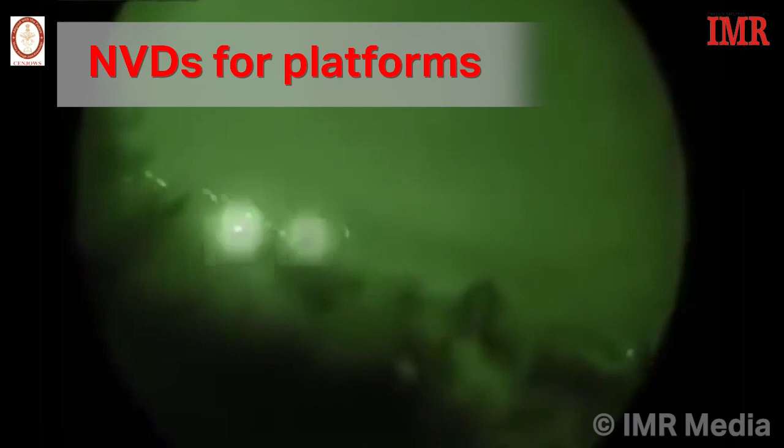The Director General of Infantry, Director General of Capability Development, the Director General of Armored Corps and the Additional Director General of the Army Design Bureau were among the distinguished speakers. There were 7 sessions over 2 days and the video recording of the proceedings were rebroadcast over the next 2 days.

So are we a go, sir? Yes, sir. All right.

So I will now start this session on emerging technologies. Gen Srivastava, Gen Arora, and my fellow esteemed panelists, and all those who have logged on to hear this session on emerging technologies, my greetings to you, and greetings to all of you from the Indian Army.

At the onset, I extend my compliments to the Team CENJOWS IMR for organizing the seminar on night vision and electro-optics, and thank all of them for inviting me to chair this session on emerging technologies.

I also welcome my fellow panelists from the DRDO, Dr. Ranjana, and from the industry. I've met a few of you, and I look forward, and I know, having met you, that we are going to have a very engaging session over the next 1.5 hours.

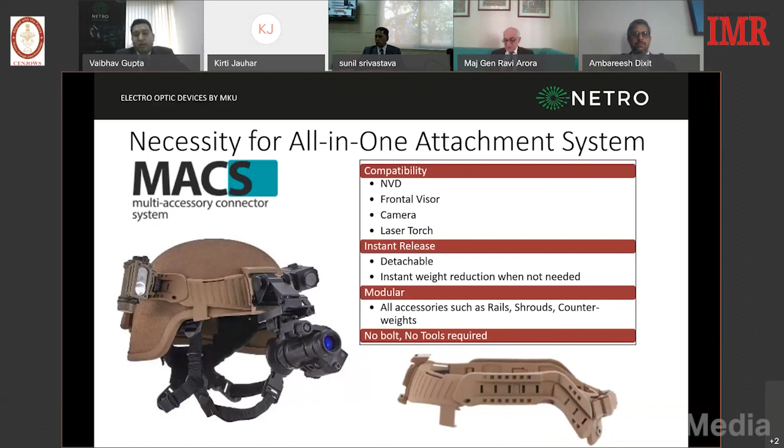This is a very advanced kind of connector system, and I can vouch for it. It is not available anywhere in the world today. We are doing it in India, and it has all kinds of interfaces for mounting night vision devices, cameras, torches, and it's very easy to use and highly recommended for soldiers on the ground because they have to carry a lot of equipment.

Going forward, we are looking into the development of our own uncooled based IR detector as well as the camera. We heard DG Infantry say that Indian companies should focus on development of their own cameras because right now we are dependent on imports and foreign players. So this is where we bring in a lot of expertise.

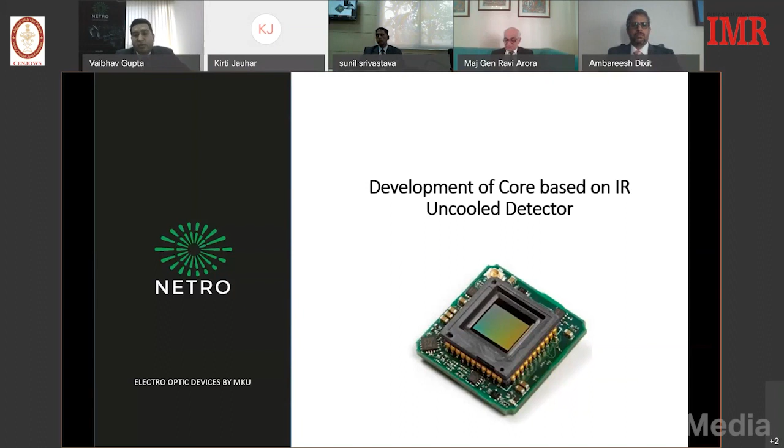The camera will be operated using field programmable gate arrays, which we call in computer terms FPGA. They are very fast and optimized for low power consumption. And the very nice thing about these is that they deliver near real-time imagery.

Right now, whenever we see a sensor and the display, there is a lot of time spent by the algorithm processing that image from the sensor and giving it to the display. This is where our FPGA technology reduces these lags, and you see near real-time imagery at your display.

We are also developing new kinds of algorithms which will help in very smooth non-uniformity corrections, which are required in the LWIR sensors. These are a must-have because earlier manual ones used to obstruct the user for a little bit of time when operating in critical environments, which was not a desirable situation.

So these are some of the technologies we are developing. We are using a fused image between the II channel as well as the uncooled LWIR channel, along with information fusing as well. It's really required that today you must be aware of your headings and GPS locations. So all this will be built into these devices, and they will be offered here in India.

No need of importing. We would be ready very soon, and we'll be offering this for demonstrations, maybe by the end of this year or maybe next year.

Now, when we talk about fusion, a lot of people understand fusion as something which is not customizable. But here is our team of experts and software engineers who really did a marvelous job of customizing fusion, so you'll be able to control the channel feed.

The next slide I'll show you. If you look at these two videos, starting from the top left hand side, you see there is a TI channel, then a day camera channel in the middle, and then you get a fused image. On the top, the fused image has 30% thermal content and 70% day CMOS content. On the bottom, you are seeing 70% thermal content and 30% day CMOS content.

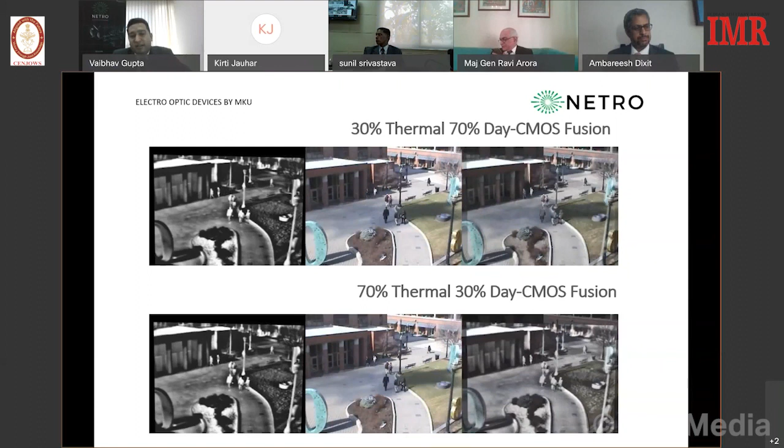This is what we are developing today at MKU, and I'm very proud to say that our team of engineers are doing a fantastic job. This is just a small video I got from them, and I'm showing it to you.

We are going ahead with DRDO, getting the driver night sight technology which can be used on AFVs and platforms. The beauty of this product is that it can be mounted vertically as well as horizontally. It can be used on AFVs, other vehicles, or civil vehicles as well.

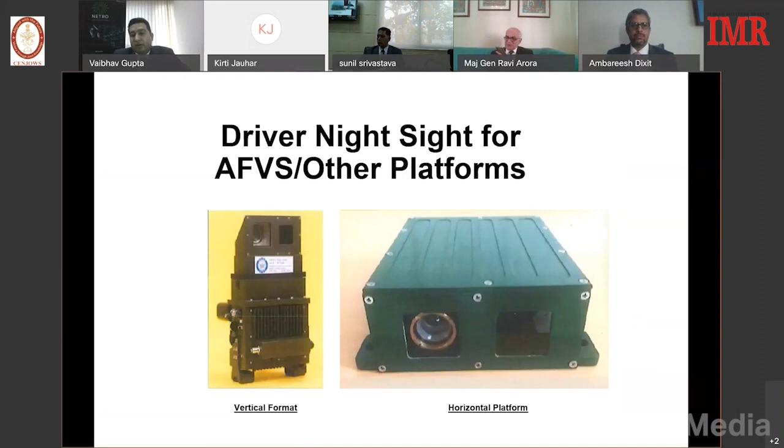It uses a low light CMOS camera as well as a TI camera, helping the driver drive at night without switching on his own lights. This is a beautiful feature, because imagine a CRPF vehicle driving in areas of Jharkhand where it gets really risky. Without needing to switch on lights, using just this technology, the driver would be able to drive perfectly in all conditions.

We believe this is the technology for the future. Even in electric vehicles, such technologies are being worked upon. This is something the Indian Army and paramilitary forces can take advantage of, and it will be made in India, at MKU and other places where DRDO is giving their technology. We would like to thank DRDO for considering us for this technology. We feel really excited and believe a lot in it, and I think it will be a really good product for exports as well.

A lot of the speakers mentioned multi-spectral cameras. Yes, we also believe in this. As my fusion slides showed, one sensor may not answer everything. So we have NIR, SWIR, MWIR, LWIR all coming together in one pack. Every sensor has its own limitations - the day sensor works in a particular band, the night sensors work in a particular band. Going forward, maybe SWIR will do a lot of the job, but you might still need other sensors as well. SWIR offers a lot of advantages.

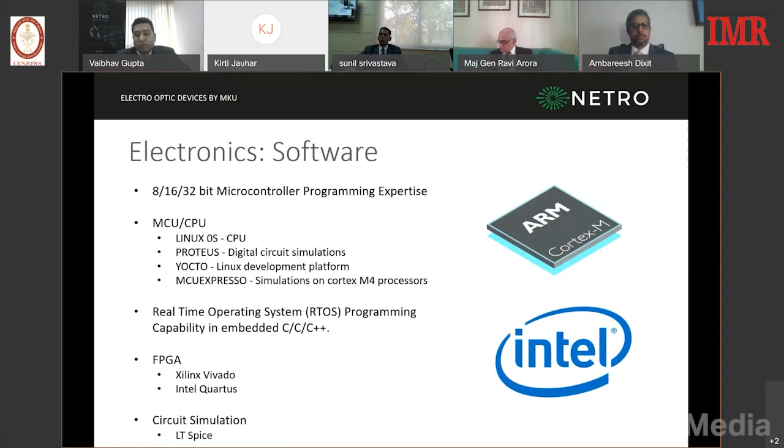We are very much inclined towards R&D, design and development. Some of the tools we use are SolidWorks for our opto-mechanical design capabilities, and Zemax OpticStudio for designing our optics, one of the world-class softwares in the industry. We also use electronics with ARM-based processors and FPGAs for faster processing on these semiconductors, including an FPGA from Xilinx which we use in our design and development.

I think every company here present might be using MATLAB, because this is one of the greatest softwares for simulations, and we are using it to design our deep learning and machine learning algorithms, which I think in the next Night Vision India seminar we would be able to share, along with how we will be deploying them on our sensor platforms and how the user will be able to take advantage.

And this is happening right now and right here, not too much into the future. We believe by next one or two years we should see some products having this kind of capability.

We have invested a lot of money into doing good quality testing and inspection, and we have our own manufacturing setup in Kanpur. We have invested a lot of money in developing a world-class lab, because military products demand ruggedness and durability, and all this is being checked before we ship in India or export to the world, like to Brazil, Southeast Asia, or the Philippines.

These are Generation 3 night vision devices which are being procured. Like Colonel Kober pointed out, we should look at technologies which are already being built in India, and if they are able to export to the world, then why can't the Indian Army harness these technologies for themselves? It would be a pity that things are getting exported to the world and our forces are not able to use such technologies. So we strongly recommend DG Infantry to look at these technologies available in the country, in the private sector or in the DPSU.

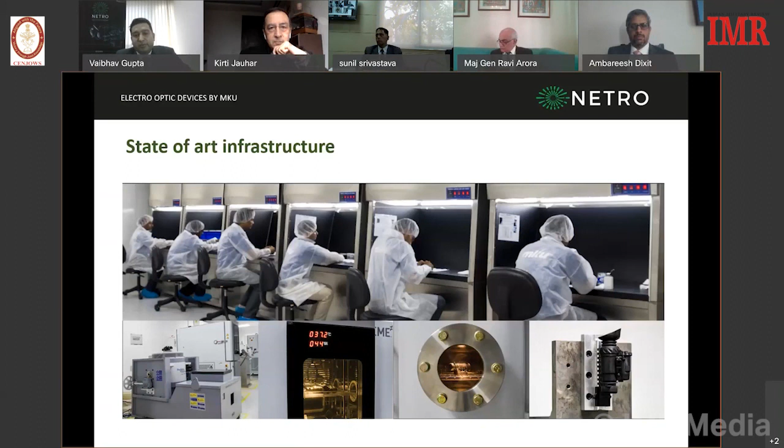Some of the other test stations we have are our own image intensifier tube test stations and night vision test stations, and this helps us to have a very strong supply chain. Whenever we are getting sensors from outside India, it's very important to check them and their quality, because merely relying on data sheets sent by foreign players is not the correct way of procuring your sensors or detectors.

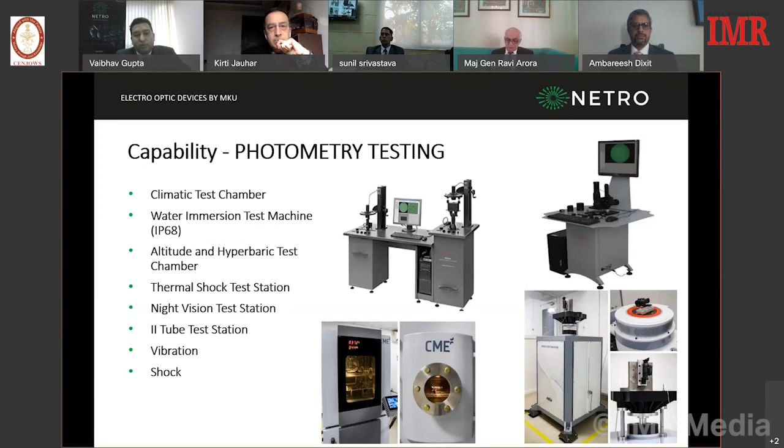This is where we have invested, and we really feel proud that these are some of the latest test equipments in the country. We most humbly invite the Indian Army and other forces to visit us, see our facilities, and take advantage of any kind of development or educational survey you would like to do. We would be most happy to assist your officers and staff to do so. That's about us, sir. Thank you so much for giving me this opportunity.

Okay, thank you Vaibhav, very interesting to hear the kind of work you are doing in your industry. The fact that you're exporting to over 100 countries as well as Indian entities, I think you're a true epitome of Atmanirbhar Bharat, no doubt about it. So our compliments to you, and an amazing range of products that you showcased here.

Multi-sensor fusion technology, we talked about it when you visited my office. And the driver night sight that you're working on with the DRDO - right now we are switching between TI and II to get the depth, but I'm quite sure the next step, which DRDO is going to tell you, is no switching, let's fuse it so the driver doesn't need to work on that.

And of course the multi-spectral camera, this is something we have been looking at very critically for obvious reasons - the capability enhancement it gives to our ISR resources, to be able to see through various conditions which other optical devices are not able to look through. So I think yes, this is great. And then to marry it with AI and machine learning, wow, that's the future. So great, thank you so much.

And now I'll request Dr. Ranjana to kindly deliver her talk on survey of night vision and electro-optical developments worldwide. I think coming from an expert like her, we are going to be deeply influenced in the Army Design Bureau and start looking at the technologies she tells us today. So all yours, ma'am.

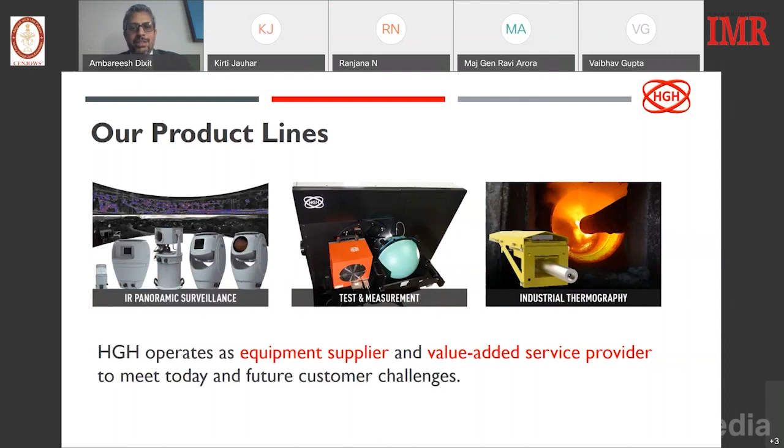Today I'm covering primarily the test and measurement products relevant to night vision capabilities, as has been the segment so far. HGH has a wide range of black bodies, ranging from low temperature applications to high temperature and even vacuum. Integrating spheres are primarily used for testing visible and near IR applications. Night vision tests are primarily for night vision goggles, monoculars, binoculars, and multi-spectral products. We have fully automated electro-optic test benches for detector level applications, collimators for testing infrared cameras and LRFs, and universal software that assists users in various tests for MRTD, NETD, MTF, and a whole lot of other tests.

Briefly, some of the prominent customers globally which HGH has, you can see specifically some prominent camera manufacturers and military test stations. In India, even premier institutes like DRDO and ISRO are also using some of HGH's test and measurement products today.

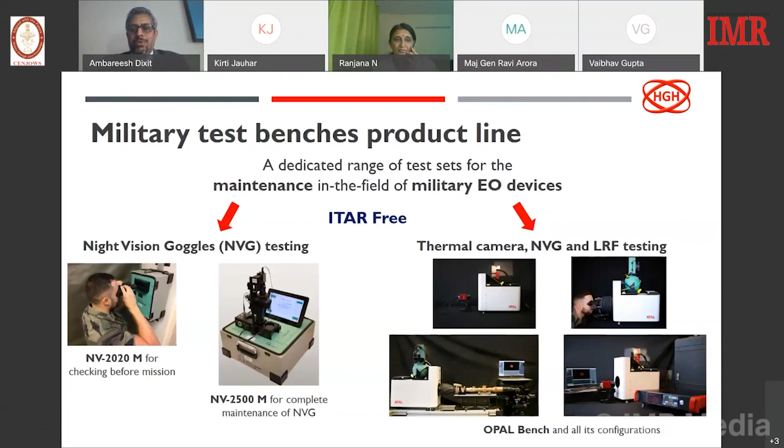So the soldier can immediately test whether his monoculars or binoculars are okay, and then proceed. This is to be tested in a dark room. The second product is the NV 2500M, which is for complete maintenance of night vision goggle testing. Many times, after a period of usage, when you want to test for issues you're facing on the goggles, this system helps you run quick tests to know whether there are issues in the NVDs you're using. The third is the Opal bench, a very elaborate, comprehensive, yet modular way of approaching testing, where you can test night vision goggles, binoculars, and multi-spectrals at the same time. It's an extensive suite of tests, typically used by manufacturers. Looking at NV 2020, this is a product used just before field deployment. The advantage is you can test at quarter moon or starlight level, and it is a portable system.

It is battery powered, and you can comfortably use it fixed on a wall, or you can carry it to a mobile unit. So it gives a lot of flexibility for a user, and it is very easy to use. The buttons are given on top. I will just take you to the next slide.

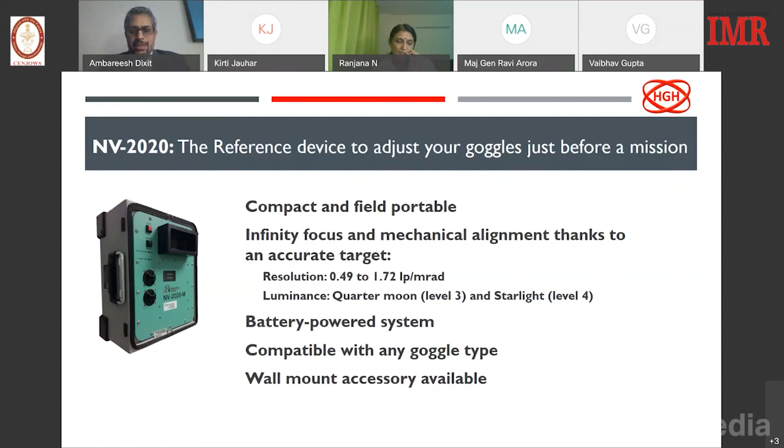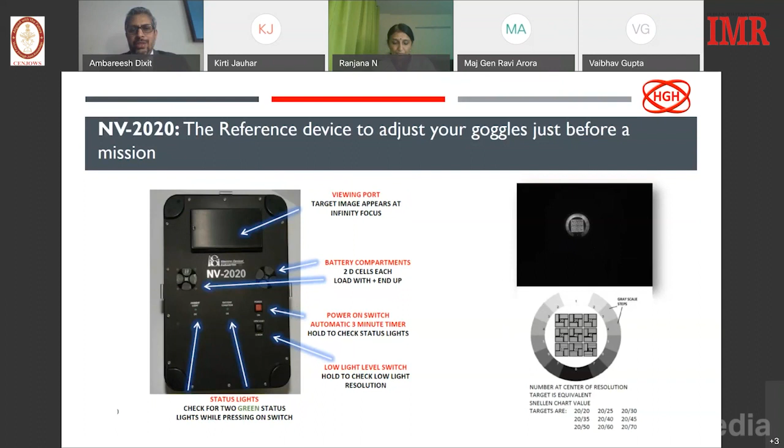Fairly easily used, today used by many global military customers. The second product is the NV2500.

This is a system which will help assess all kinds of tests that you can run quickly. You can have a number of tests related to its resolution, gain, spot defects, MTFs. So all these for you to run without having to go back to the manufacturer, because now we are in a situation where already there are a set of older generation goggles being used. There are multiple manufacturers now quoting in, and the requirements are growing.

So there are different types of night vision goggles which will be in use. And to contact every manufacturer every time is an issue for the user and the buyer. So this could be a system used by the user, for example by the Indian Army, maybe at a certain command level, where they can identify certain levels, collect the defective ones and test them before sending them out to the manufacturer. The same way, this could be used by the manufacturer before they supply to the end user. So this system can be used by both.

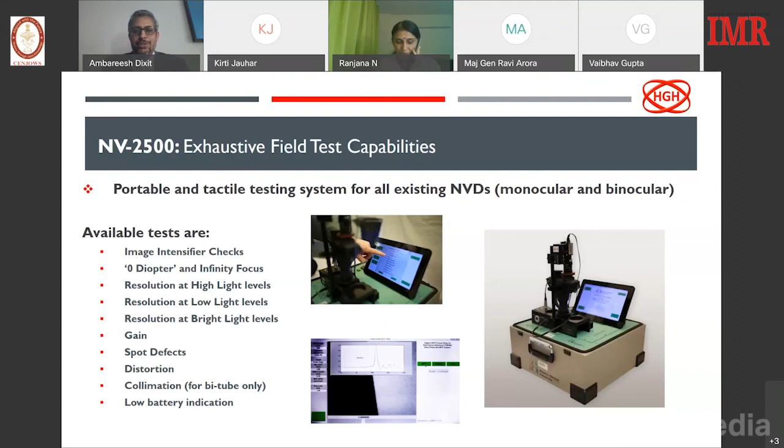So the next one is the Opal bench. There are various options which a manufacturer can look at to use. One is just for testing basic night vision goggles. Second could be for thermal cameras, and third are for weapon sights and for the multispectral cameras and NVDs that we are using. So the Opal bench is something which will help a manufacturer definitely, maybe to go from a scale-up in a modular way, which becomes much easier for them.

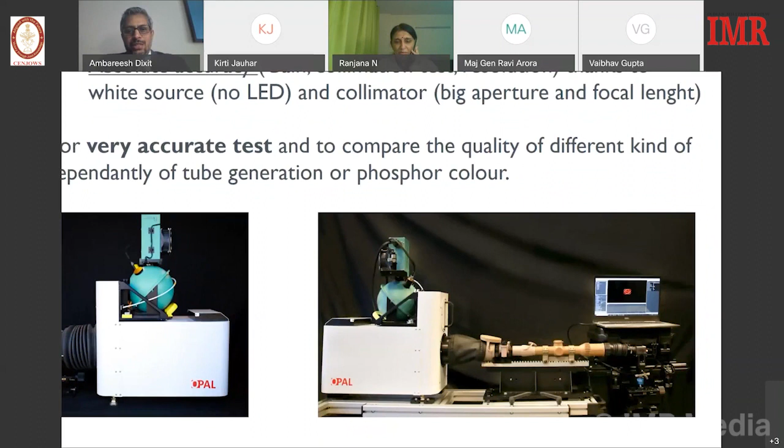Like the image which you can see on the rightmost, that is for a sniper. That is why you see it is fairly long. You can look at this, it is a very long spacing here, and this is as per what is supplied, and this could also be used for testing, so it depends on the status.

But the advantage is that HGH carries a tremendous know-how within the company with all of these products. It's been there for decades now, with experts in this field. All these products are designed, developed, and manufactured by HGH, which is one of the most important criteria.

There is no outsourcing or contract manufacturing which has been done, so there's a tremendous level of quality control and performance which is achieved. There's a high level of accuracy of the tests which are maintained, because there's complete control in the entire test setup that has been supplied.

Apart from these, we also supply full-fledged test benches at the detector level. So these are the various options available for night vision goggle testing, especially as manufacturers move towards even auto-gated kind of systems, because that is the biggest challenge when it comes to using NVDs. But we are able to test even for those kind of goggles.

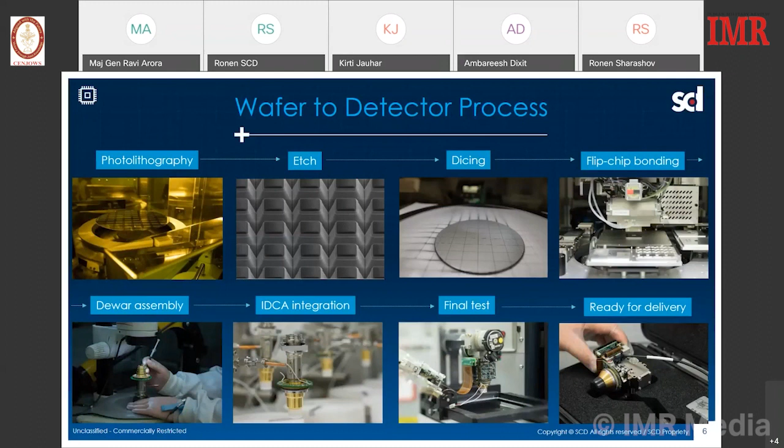All these benefits we can provide to our customers are basically from our wafer to detector process, which we have mastered over the last 40 years in our production facility, through fine-tuning each one of the production stages in order to develop the best technology, the best detector that exists today in the market - from photolithography, etching, dicing, through the final test and readiness for delivery.

And all this is done in our unique and state-of-the-art production line, which I would like to share with you a little bit in a short video coming next.

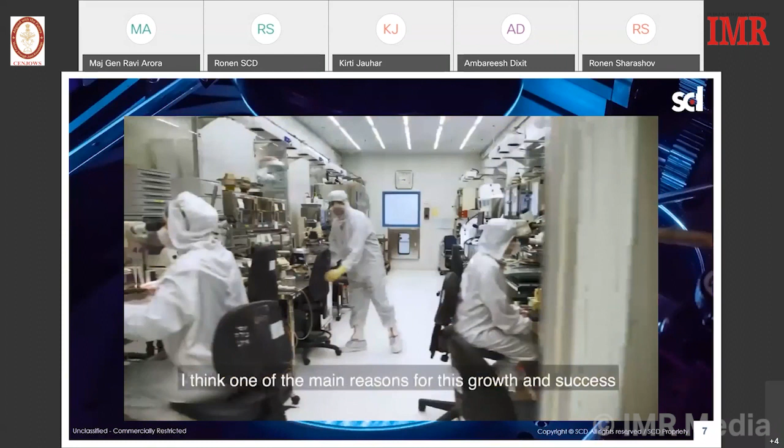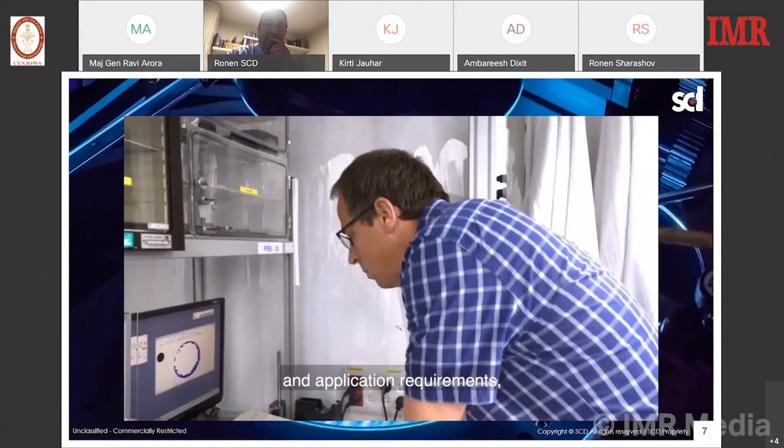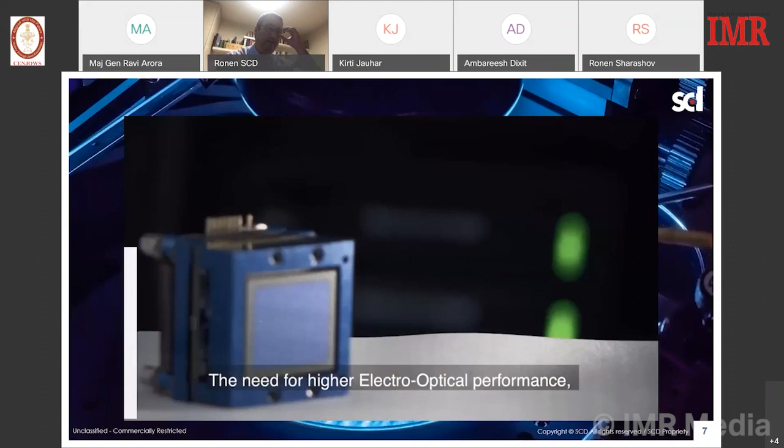Can you hear it? Yes, I can see. Can you hear it also? Wait. Yes, but can't make out what he's saying. We can read it, but cannot hear it. You cannot hear it.

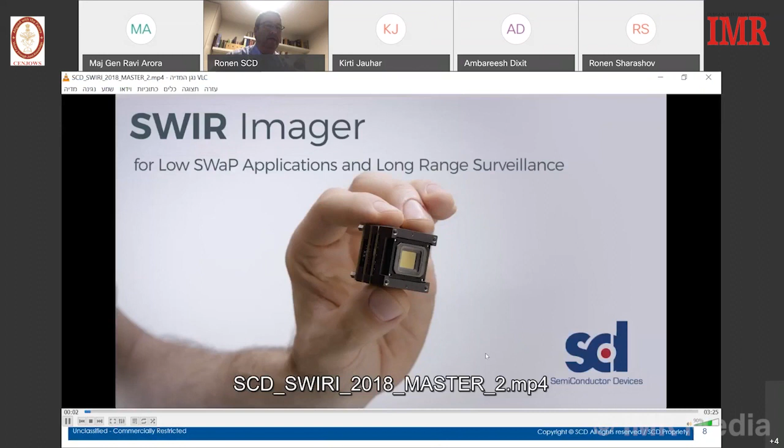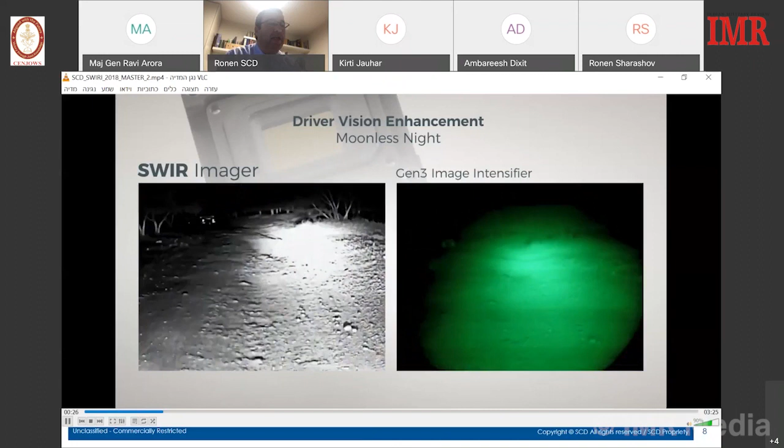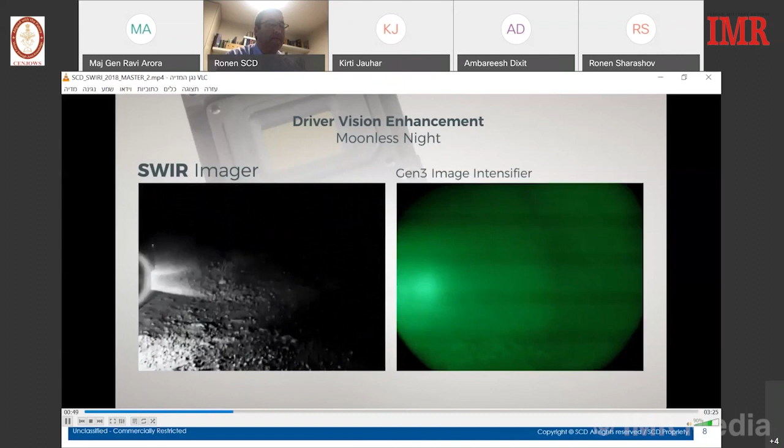It helps and supports situations like fog, smoke, and haze penetration in daytime.

Night vision goggles now use Gen 3 image intensifiers. We have introduced the SWIR imager, a core technology and video engine developed at SCD, successfully deployed in several conditions including moonless nights.

You can see here an example of a side-by-side test field comparison. On the right side is the Gen 3 image intensifier, and on the left side the SWIR imager capabilities.

We have developed a miniature, small size, weight, and power detector for miniature payloads, either binocular or handheld applications, or for lightweight drones or UAVs.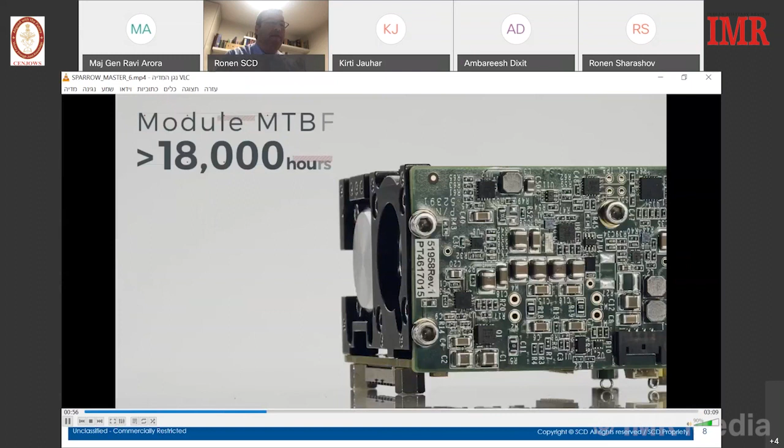SWaP less than 300 grams with a very attractive linear cooler. It's a HOT XBn 640 by 512 with an MTBF higher than 18,000 hours, which is extremely excellent and challenging today. It has been deployed and proven in security and surveillance applications.

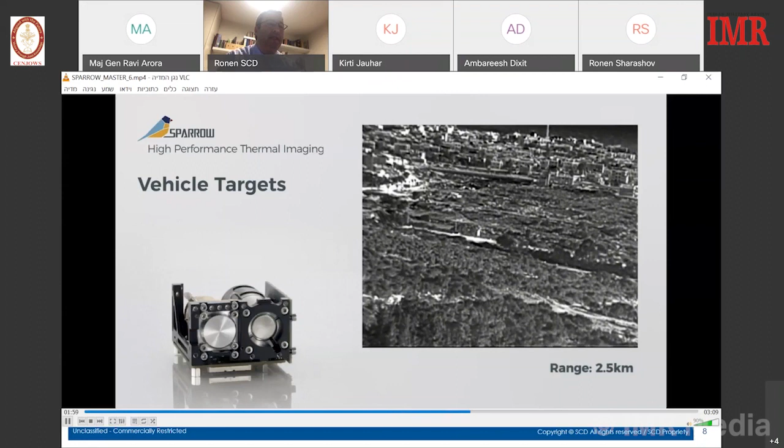We have made videos here for a wide range of applications. You can see at the bottom the ranges and the targeting we were testing and evaluating through our development stage. It's excellent performance in night detection and recognition for human targets, with excellent resolution and DRI achieved.

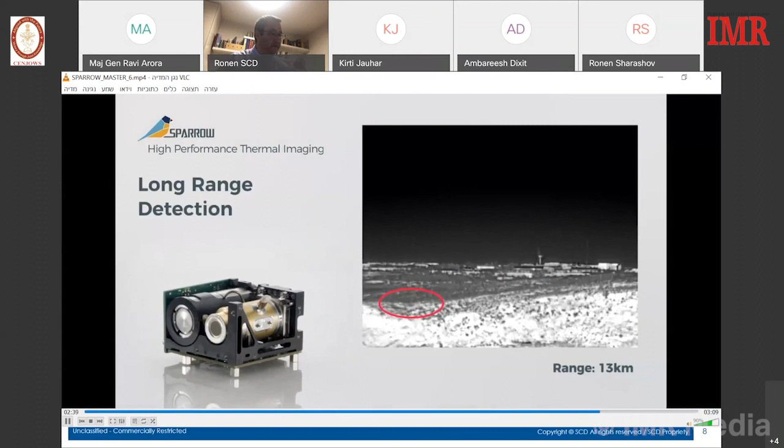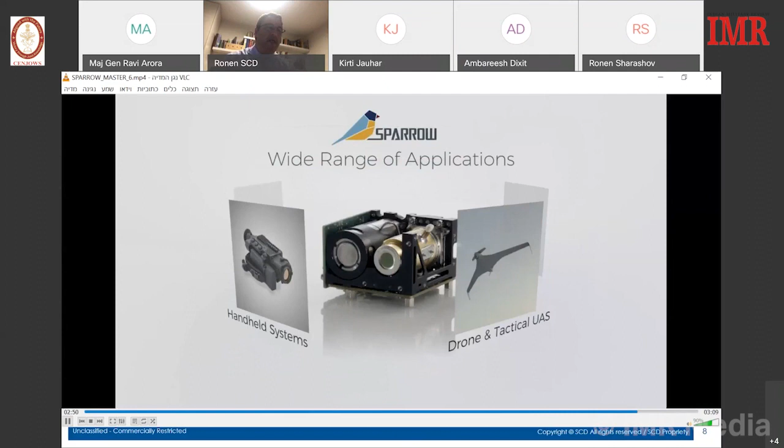So in summary, the Sparrow is one additional video engine that we were able to develop and provide through our successful investment in video engine technology.

Meeting the customers' requirements and demand for video engine. Regarding the shortwave IR, the indium gallium arsenide, my colleagues and friends in other companies have also mentioned it. SCD is the leader in the world for shortwave IR. Our detectors, video engines, and cores are being deployed throughout the world, and we started it long ago.

More than 10 years ago, we invested significantly in the technology and capabilities. We started with the Cardinal 640, ceramic TEC-less 15 micron pitch, deployed already in 2016, and continued with the Cardinal 320 by 256 30 micron. In 2018, two versions, one with low noise and ceramic, and a PCB technology. We recently shared and provided a large quantity of 1280 by 1024, 10 micron Cardinal 1280, which is an HD state-of-the-art technology to a variety of applications throughout the world.

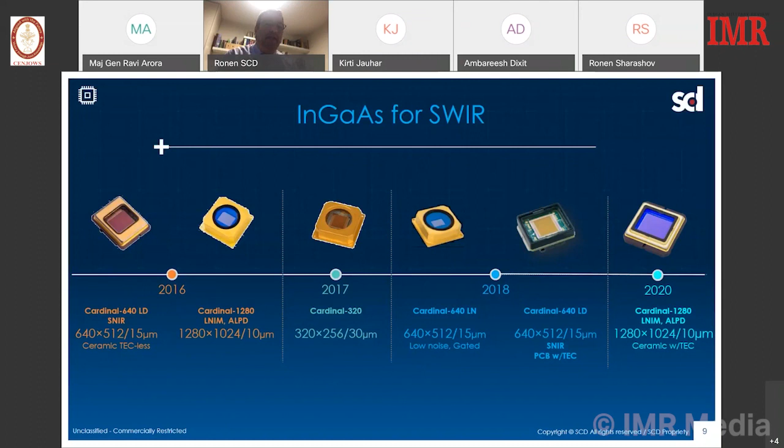And with this, I would like to end my presentation and thank all of you for giving me the time and opportunity again to participate in Night Vision India, and I appreciate your time and your questions if you would like, later on. Thank you so much for your time.

Thank you, Ronen, for giving us an overview of the available technologies. It was very interesting to see the video engines that your firm has developed, the SWIR imager, the Sparrow detector, high performance TI - very interesting to see these latest technologies. I'm sure the Indian industry, which is listening, would be proud that they're right up there with the development they are investing in, but also take a leap from the kind of technology you have talked about. So thank you very much for your time.

And I'm also told that we have Mr. Vinod Yadav from Tata Advanced Systems - I hope I got the company name right, because there have been so many changes, it's difficult to keep track of them right now. He is, I think, head of design, computing and optronics platforms, and he will be talking to us on technologies and solutions in the electro-optical domain. So I'll hand over the floor to you, sir.

Thank you, sir. And it's nearing lunchtime, so without wasting too much time, I will jump onto the relevant presentation of mine. My colleague in the morning would have already given an overview.

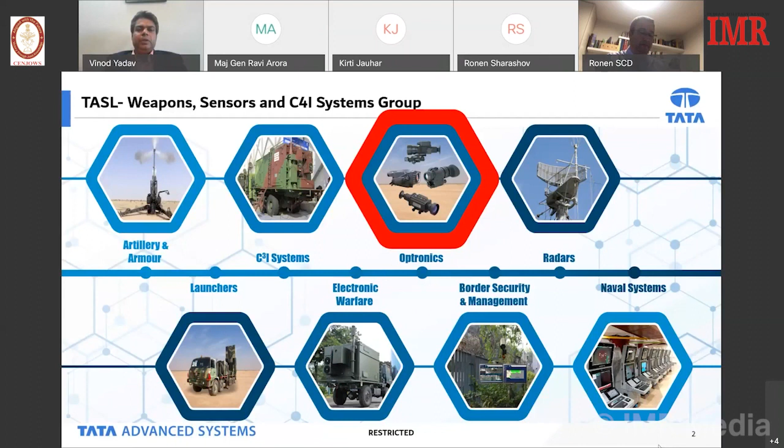So as brought out by my colleague, Mr. Ved Prakash, in the morning, we have been developing night vision systems and electro-optic multi-sensor systems for the past 7 to 8 years now. We have complete end-to-end design as well as manufacturing, high volume manufacturing capability to manufacture these devices. We have a very strong R&D team continuously developing these products and systems. We work very closely with users to understand their needs and develop products in line with their requirements, while also bringing in the best technologies available around the world in terms of sensors. Sensor onwards, everything is something that we do.

Some of the recent products we have developed include the 50-kilometer long-range observation system. We are proud to say that in recent trials, our system could do vehicle detection at 50 kilometers, for both visible and thermal imaging. Besides this, we have been working on uncooled thermal imaging. It is heartening to see that after years of pursuing this area, the tenders are coming in, and in good numbers. We are confident that our products, based on previous generations we have built and on futuristic technology, will be able to give the user what they want.

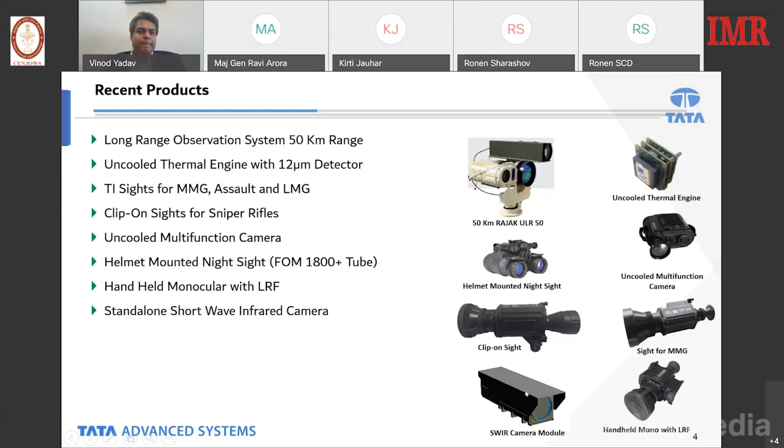Coming to the trends in the military EO domain, and something that we are also pursuing: SWaP reduction happens with every generation, and we also continually work towards that. Apart from that, we are looking at adoption of high definition sensors which are smaller in pixel pitch, giving them the ability to manufacture it in larger formats so that the user gets high definition imagery.

We are working in spectral bands such as SWIR and developing multi-sensor solutions around it. We are also working on improving existing sensors' capability by means of signal processing, both at the hardware and software levels, doing multi-spectral sensor fusion. We are adopting higher FOM tubes, greater than 1800, for image intensification based night vision systems.

Command and control for imaging sensors is the necessary backbone. It's a multiplier because you can get more intelligence from different bits of information coming together, and you can fuse it together to get a more derived intelligence of the overall situation. Based on that, we have been working on command and control as well.

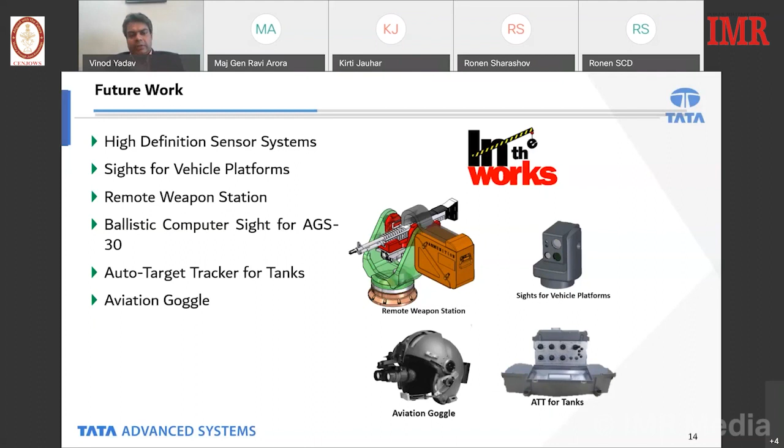To do all of this, we have complete in-house design capability. Capabilities like these are not built overnight. As a company, we have been an R&D house first, a manufacturing setup later, and we believe in doing our complete R&D end to end. This encompasses several domains that have to be combined together to reach a final end product. Thankfully, due to our legacy in electronics and other systems, when we decided 8 to 10 years ago to go into optronics, we could harness those capabilities and build up the incremental electro-optic and optical design capabilities required, and come up with products at the pace you have seen.

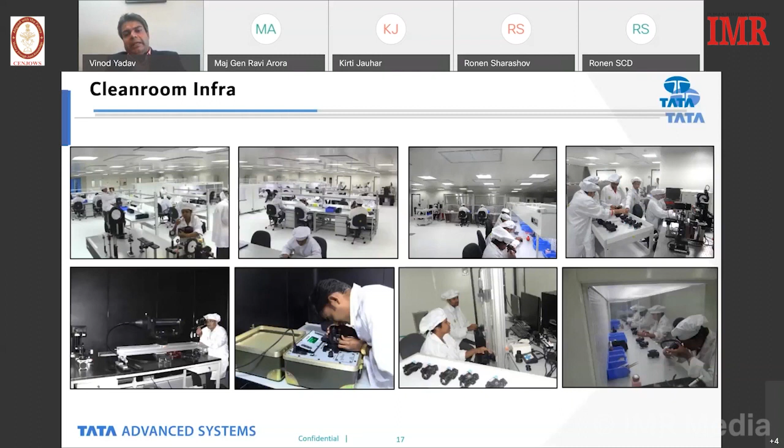We have taken steps in this direction to ensure that we have the right clean rooms, the right scale, the right tools - like ERP, a product lifecycle management solution, and version control methods - all ensuring that we are able to provide an end-to-end solution starting from concept design to production grade deliveries in the shortest possible time frame.

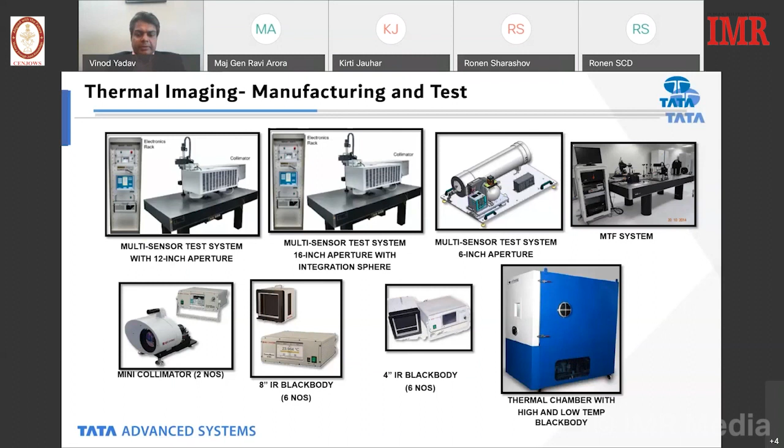These are some of the test and measuring equipments. We have a variety of them which are used both for R&D as well as production. The volume claims that we make are based on the confidence of the equipment and the skilled trained technicians that we have with us. This gives us the confidence to plan and claim that we are able to provide 800 to 1,000 systems per month. Even on the image intensifier, we have complete end-to-end test capability and assembly capability, both for the equipment as well as the tubes themselves.

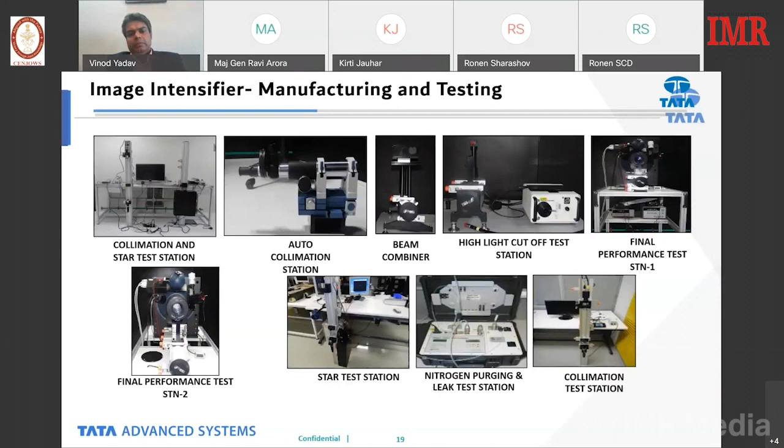So to summarize, we are in line with the latest technology trends in the military EO domain. We are focused towards development of new generation EO products and solutions required for the Indian market. We are working on several development programs which we see as potential growth engines. Apart from that, we have our high volume production capacity that serves the purpose of bringing this cutting edge technology to the end user in a very short time. So with this, I'll end my presentation. Thank you for your patient listening.

Thank you so much, Mr. Vinod. That's a great talk you gave about the capabilities - we are very well aware of it. I got a first-hand look when I visited your facility, both at that end and also the other day when you showcased a few equipment here. So yes, there's great work being done out there by you all. Our compliments to you. You have been offering solutions which have already got inducted, and some more are very forthcoming.

I'm quite sure all the best in the ones that are going on, and your future projects look very interesting. I'm quite sure the Armored Corps, all those who are on board, would be listening very carefully to the solution that you offered. And not only you, I would reach out to everybody out there, all those future projects, these technologies that you're working on, do share them with us, do reach out to us. Probably we can align together to develop what could tomorrow be used by our soldiers. So thank you very much, Mr. Vinod.